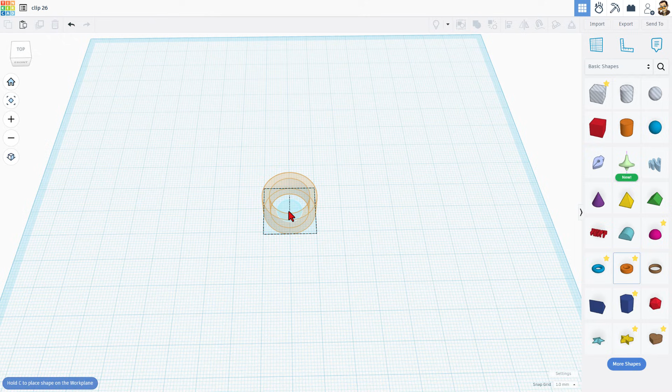In Tinkercad, we can build with basic shapes. This one is called the tube. When you bring it out, I'm bringing it close to the center of the project. Notice it fits in a 20 by 20 grid. When I set it down, do not drag the handles because those break the parameters.

I'm going to just tell you to type these numbers. We are going to put a 20, and we are going to set the wall thickness at 3. You can leave the rest of these alone.

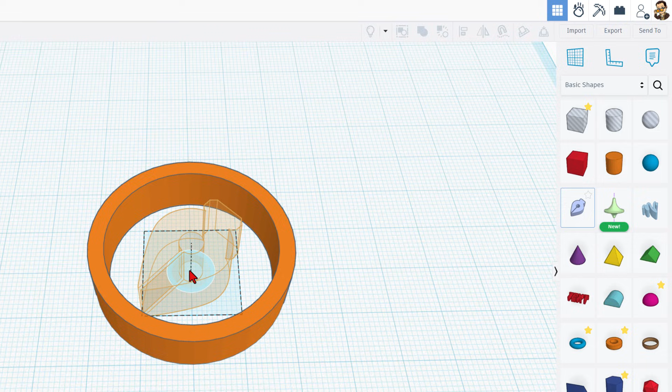The next part we're going to use is the sketch tool. When you bring this out, set it right in the center. Notice it has a dotted line that helps you line it up, and also it fits in the 20 by 20 grid. Once you launch Sketch, please note the sketch features.

This is a fantastic area that is shared with us. It gives you all the tips and sweet tricks that you can use to make Sketch a little bit easier. When you're done learning, you can simply click the X.

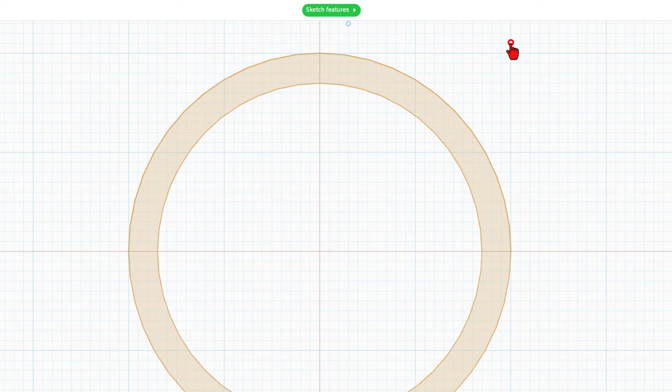First, it's got a snap grid. We're going to set it to 1/2 because since I made this 3mm, that lets me easily find the halfway mark. We simply want to click halfway in between those.

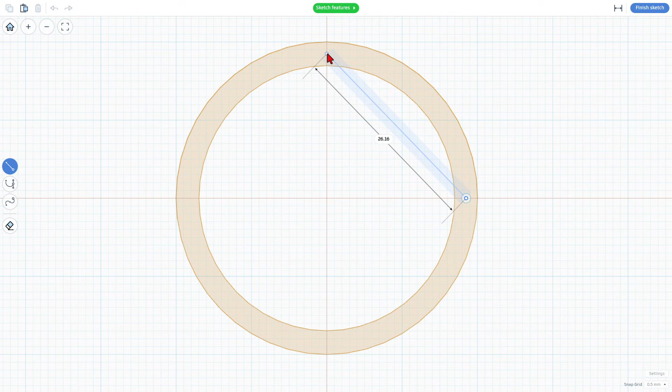And then we want to click right up here, halfway in between these. And then we want to click over here, halfway between these. And then we want to move down 25. Notice it gives you the number, and are you ready for this? If you hold down Shift, it forces it to go straight. So there is my 25 measurement for that leg.

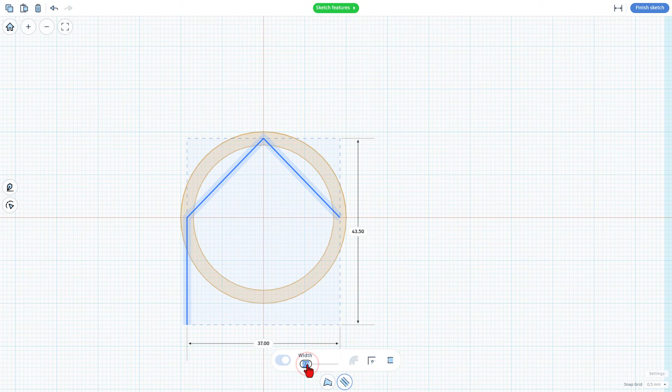I can hit escape to finish that. Remember we had size 3, so bang, I can simply hit 3 and it now fits that edge, but we do have to do this. Double click and we click up here and hit number 2 to make that smooth.

Now when you get to this handle, click, hold Shift and stretch it straight out. It's that same skill where it locks it straight. Now I've got that so it's mirroring that edge, and we've just created the main part that we're going to use.

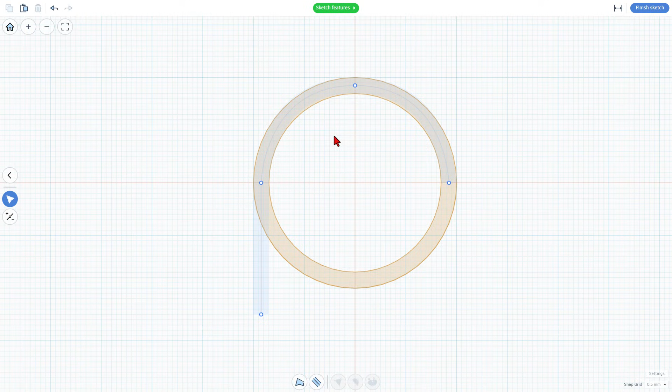It's time to draw our awesome thumb grip. First, double click to finish that part. And then notice if we go 2 centimeters out and we go 1 centimeter down, we've got 15mm left. We want to build from this dot right here.

If we hit P for pen to start it, and we want to move out 7, once again, we can see the numbers. I'm going to go up 1 over 1. Notice that does make a half.

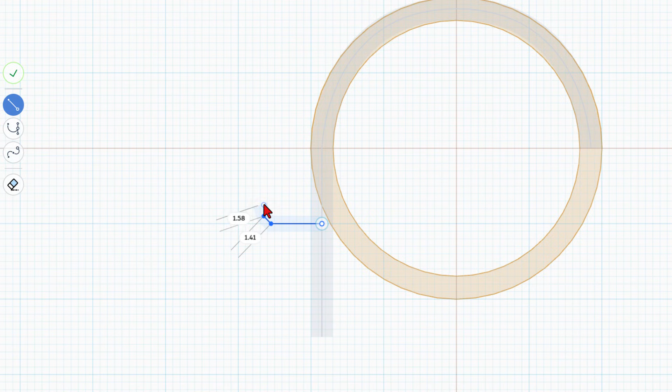I'm going to go back to that same spot or close. If you miss this, it's not a big deal. And then we're going to go over 11, and I'm going to click and make that straight. So I just built it with straight lines, but once again, I can click and change these.

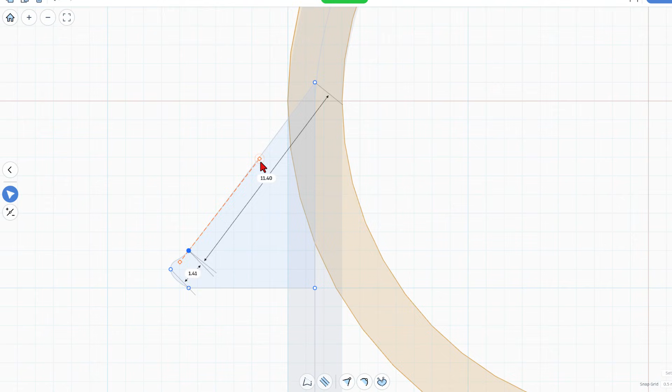Make that a number 2, and it makes it smooth. And then I'm going to take this one and make it number 3, which is broken. What that allows me to do is bend this independently. So now I can give this a nice sweep.

I can click on this point and move it over 1/2 millimeter with my nudge. And I can just adjust that 1 click. So we've got a nice smooth part.

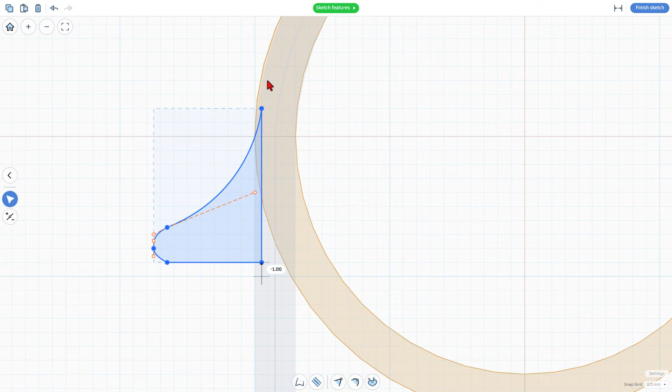Then we can grab this whole piece and move it out to the edge so that our design smoothly switches. I'm going to even move it back 2 more clicks so you can see that's just a little bit more smooth. Now if you look behind the orange line there, it's not quite as smooth. Just remember that's that tube that we built earlier.

If we hit finish, we can now click on that tube and change it to a radius of 50. And then when you look at your shape, you can see just how smooth it is.

I will show you quickly, we could have made these sides smoother, but it really doesn't change anything for what I was trying to show you.

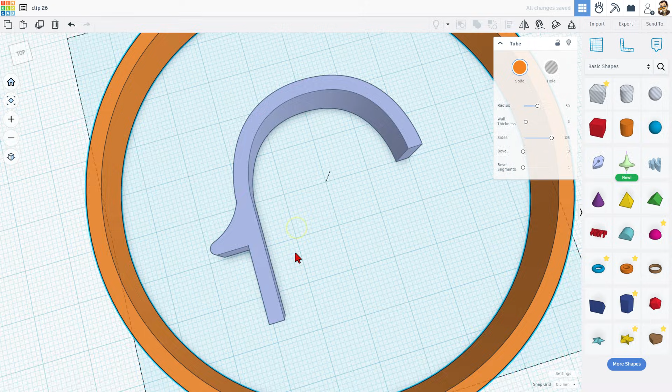Now we need to cut a hole under this. We're going to actually cut it with this same part. Do Control D, make it a hole, and choose Edit. Now everything in here is trash, so we can delete those, but it gives us a great view of the inside of this.

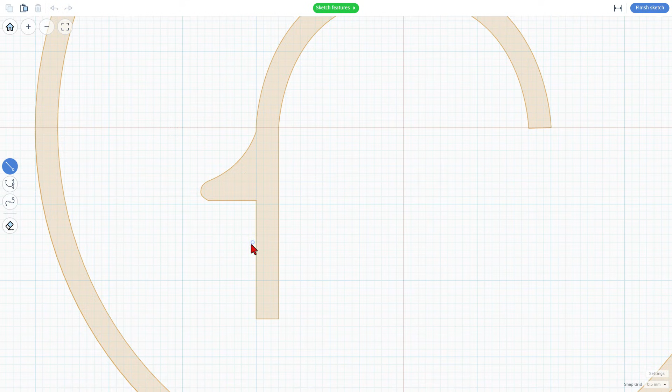So I'm simply going to keep my half millimeter nudge. I'm going to go all the way back to this edge, and I'm just going to make a part that goes all the way past it. And I'm going to come back 5 millimeters, so you can see the measurements. There's 11. Come across, and I'm going to finish it like that.

Notice I missed that point. No big deal, I can double click on that and bring it back, and it really wouldn't have mattered anyhow.

Now when I hit finish sketch, I've got that awesome shape, but I do not want to cut 10, I only want to cut 6, and press enter. Now I'm going to grab those two and do Control G to union group them.

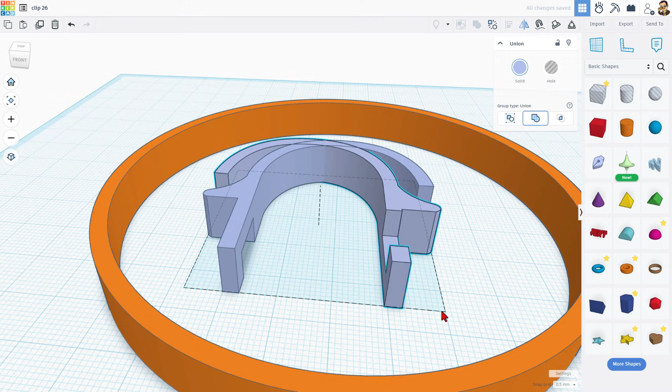That is our clip. We can also do Control D, and I need to flip that one like this and vertically. Make sure you get the angle so you can see that. Then we simply need to use the nudge to get these to line up.

Even with our 0.5 nudge, if we do shift nudge, that's 5 millimeters, 10 millimeters, and then you can just bring it back to get it perfect. Bang, we have just created our little clip.

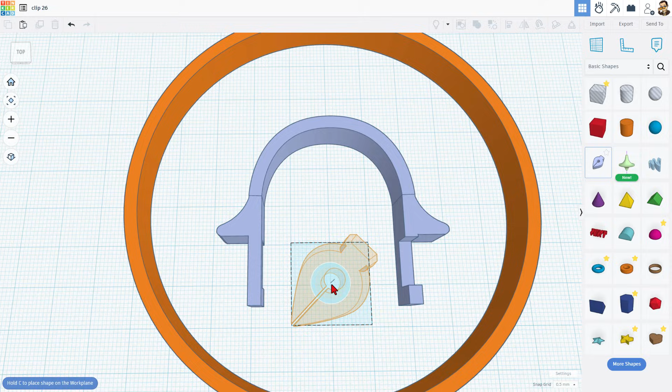Now we just need to make the fancy ends and connect them. We are going to make the end with a new piece of sketch. I'm going to bring it in and just set it in the 20 by 20 grid right here. I'm going to choose to build this right here though, this way, because it works better when I look at it. So we're going to make this 16 millimeters out.

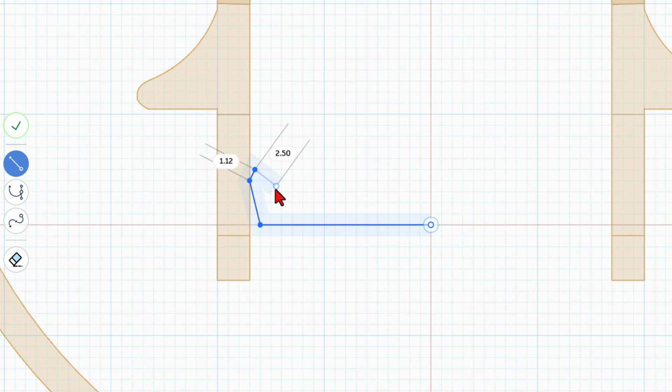Then we're going to go up 4 and over 1. Then I'm going to simply go up 1 millimeter. Then I'm going to go down 2.5. Notice you can see that number. That's what's so cool about this.

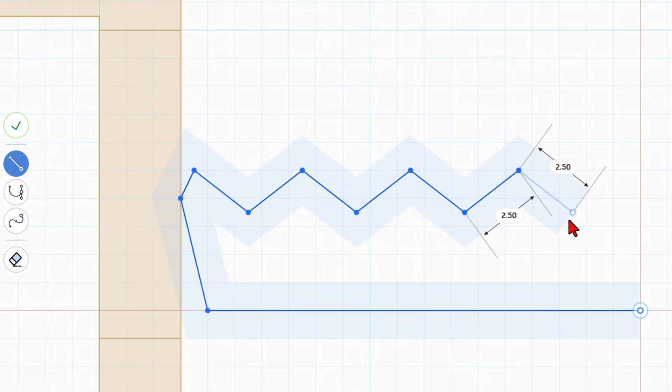If we zoom in, these dimensions stay out of our way, and we can just find the next one that says 2.5. Notice it's on the same line. Move down here, find the 2.5, bang, bang, bang, bang.

So we saw the middle line, and I'm just going to do the same thing where I go up past, and then we're going to finish it.

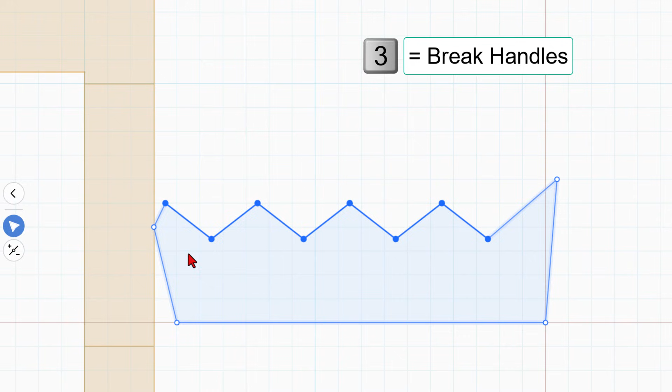Now we can double click, and we're going to simply grab these. Note I'm on this side. I'm going through and selecting all of those, only getting this one. Notice I skipped that one, and then we're going to hit 3 to auto smooth them. Bang, we have just got a gripper.

Now I am going to modify this. I've decided just now that I want that to be 0.5 millimeter higher. All we do is start from here, and we can drag across. Notice I've only got those 4, and go up 0.5 millimeter. That's the shape I want.

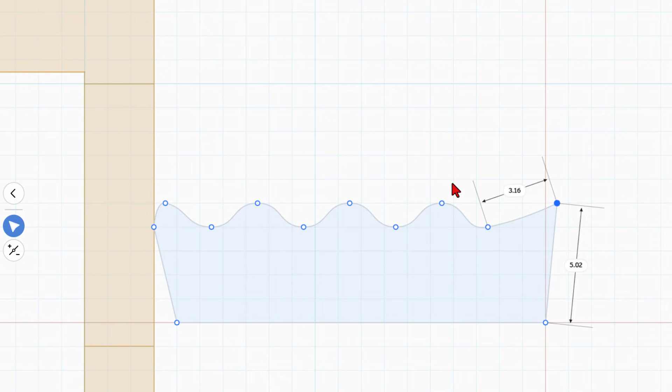I'm also going to take this one down here and just make it a little less. I think that's going to look better when we're done. Now we need a second gripper.

Check this out. Control C and Control Shift V. Shift nudge to move it up. We can flip this by making this negative 5.

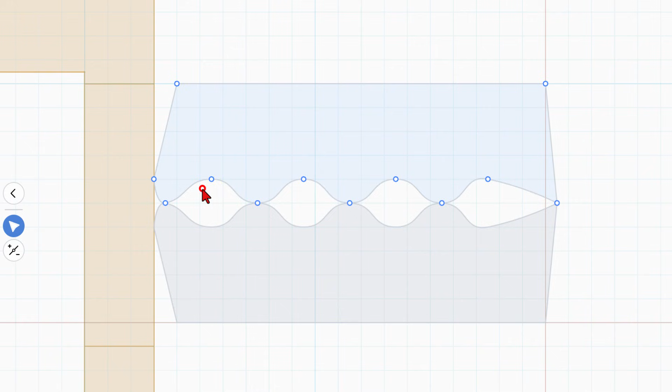And then if we double click this one and we just grab the points, now notice I missed that time. So I'm going to do Control Z. And then from this gap, if we just grab the points, notice I got rid of those numbers intentionally. Now I can do that same trick where I just grab these.

And we're just going to use the arrows to get the curves to move the other way. Notice this one is a tiny bit off. I click somewhere else. Let's zoom in so we can get away from these, or you can disable them. Remember, we had those on because they gave us the measurements we needed.

And I'm going to set my nudge to 0.1 just for this fine measurement right here. And bang, if we zoom out, we've got our opposite teeth.

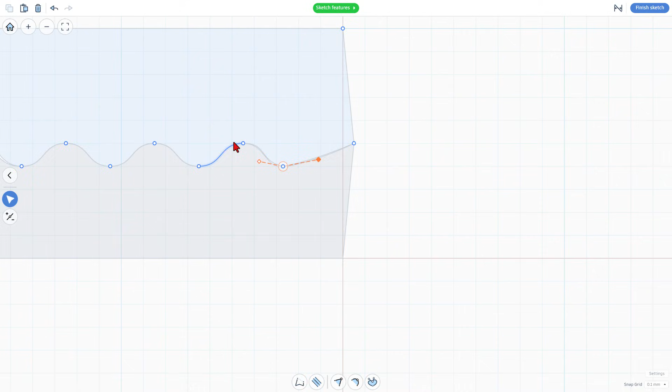How cool is that? Now we do need these to be separate, so this part is a little bit tricky. Finish sketch. Let's start by rotating 90 degrees and doing Control D. And then the teeth are going to face opposite ways.

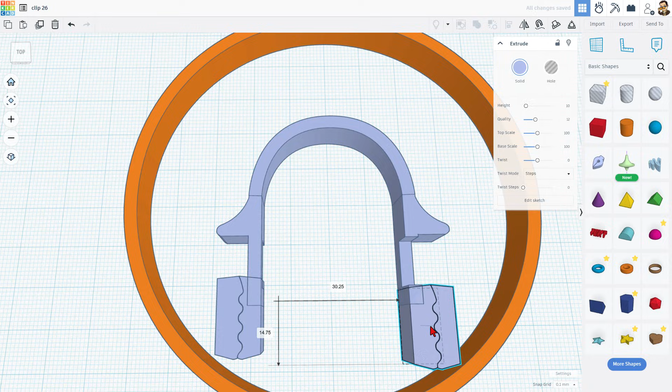So check this out. I'm moving these teeth to this side. I'm moving these teeth to this side. Now we simply double click and get rid of the ones we don't need.

Move this out to the edge. I'm going to hit Finish Sketch, double click, click, delete, and move these out to the edge.

To achieve our pretension, this is where it gets really slick. Click on this edge, hold down Shift, click the tube. Zoom out till you find this rotation handle, and simply rotate right 1 click, or 22.5 degrees.

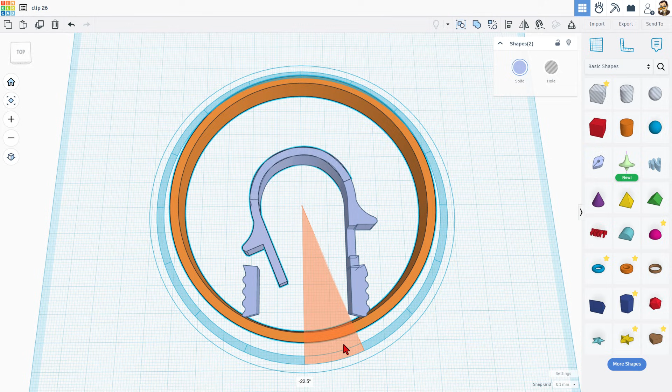Let go, click the other side, hold down Shift, click the tube. Once again, 22.5 degrees, or 1 click in this direction. Notice this will be a little thick back here, but that's awesome.

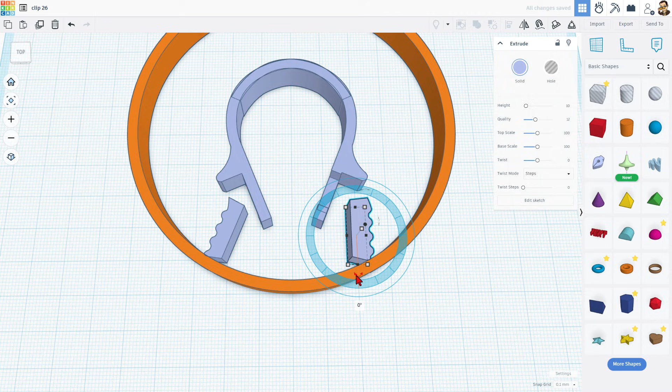It just gives us some more pretension. Now we can grab this one and rotate it 22.5 degrees. Grab this one and rotate it 22.5 degrees. And then we simply move them into place.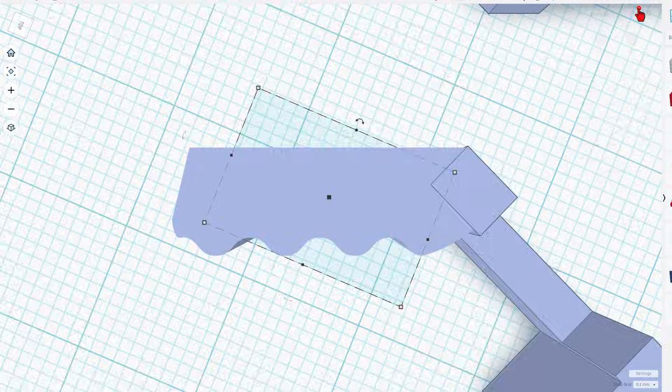And finish sketch. That, my friends, is a clip that this is going to come over top once we print it, and you will have a pre-tension clip.

Simply grab it all, choose Export, STL. I'm in my 3D modeling folder, and I'm going to keep that name Clip 26.

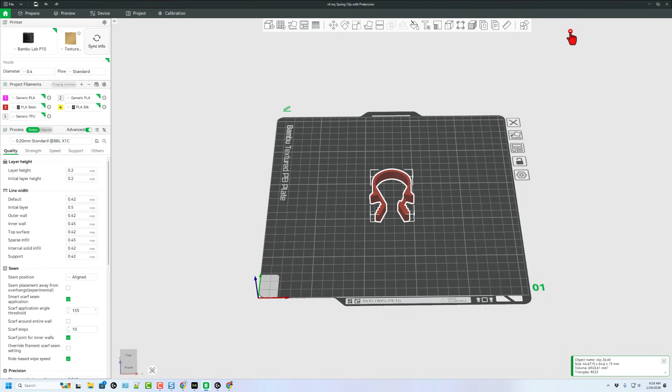Of course, now we can bounce to Bambu Studio, create a brand new project. Let's add that file. Once again, it's at the very top of my 3D modeling folder. I'm going to print it with generic PLA.

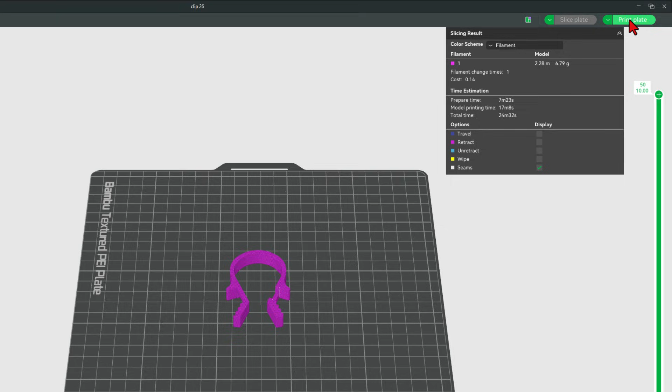I do want to switch to the strength setting, 0.2, and let's slice the plate. We'll have a fantastic clip in about 25 minutes. Let's hit print plate and send it to the 3D printer. And less than 30 minutes later, we have got a clip.

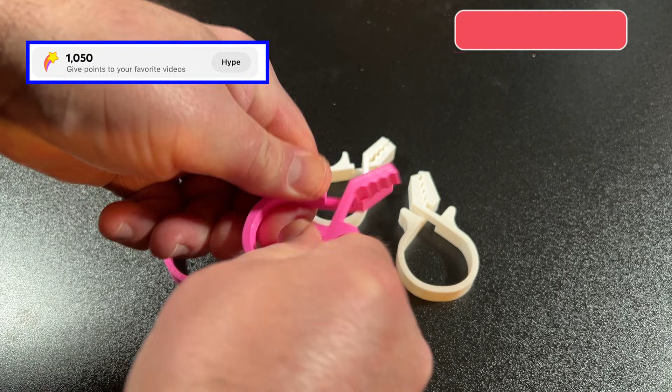All right, so here we are with our brand new clip. This was printed in strength mode. We just bring it over, and then when you squeeze, it opens. How cool is that? Now, of course, there were several tests.

You can see I did not get the teeth right there. This one, of course, is great. This one just flat out didn't even work. Notice they're aimed the wrong way.

You can test and have fun and make these as awesome as you want. You will notice I do want to highlight this one opens the furthest because I made that gap the full length.

A quick wrap up, I want to give a huge shout out to ZDP189 for starting me down this path. He shared the initial project and made this all come together.